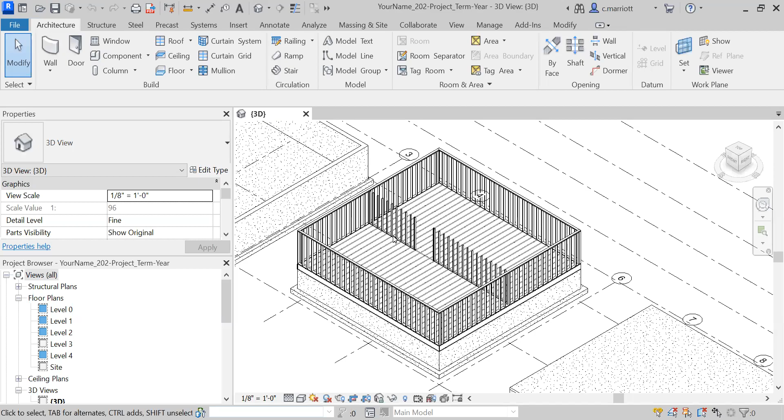In this video, we'll continue working on this bearing wall. So we're going to start adding some of the top plates across the top here. I'll do this by copying one of these and copying it up to the top of the studs. So I'm going to go to section number 1.

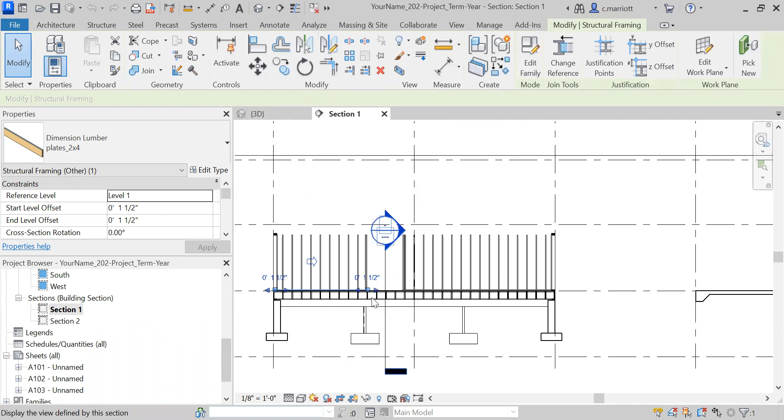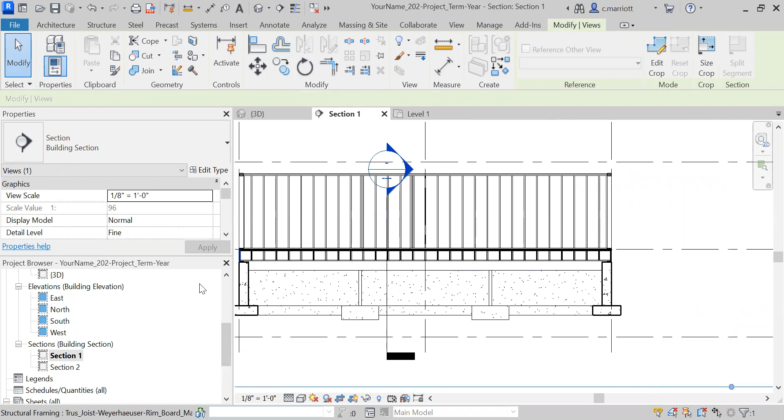Okay, now one thing that we'll need to do, if you go to level 1, and if you haven't done this already, if I click on that section, if it is stretched all the way back to here, when I go to section 1, it's going to show all the framing in the distance. If I don't want to see all that framing so I can isolate what I'm trying to do, I'm going to go back to level 1 and pull this closer in so I'm not seeing this line of studs in the background. So go back to section 1.

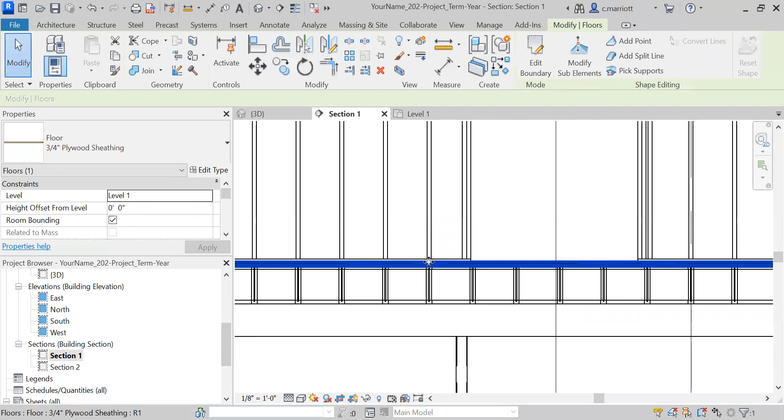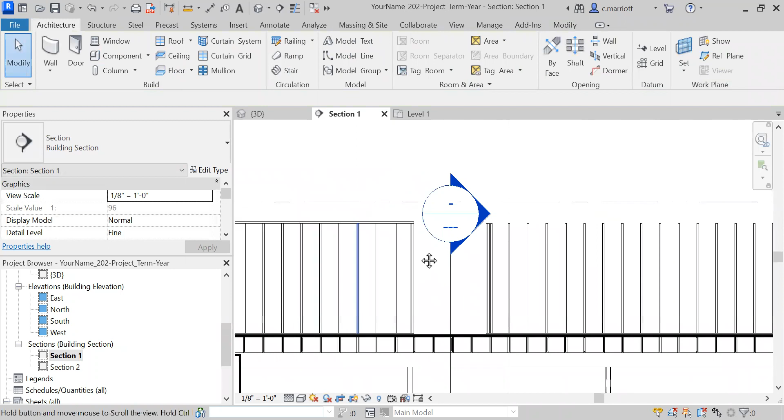And this is the plate that I'm going to copy up. Oops. I come in a little closer, copy, and my dimension is going to be the stud height plus the thickness of a plate. So I'm going to do it at 41.125 inches. And let's see how it is. Okay. Now, for these top plates, they need to stretch all the way across.

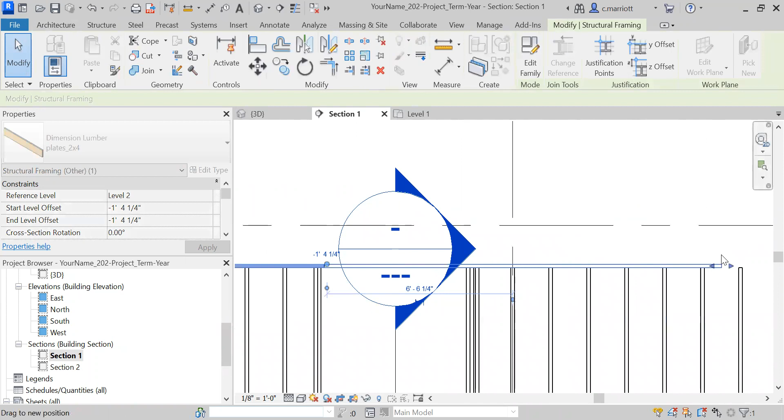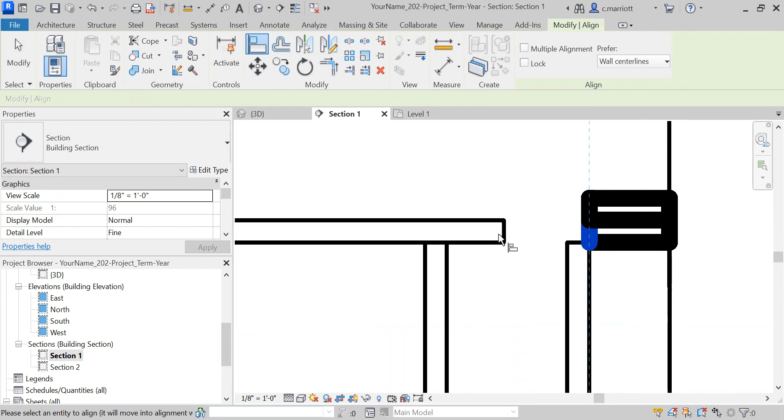Oops. So I'm going to click on it, having some issues here. I'm going to stretch it all the way over and grab that little triangle, pull it across. And when I get a little closer, I will use the Align tool to bring it the rest of the way. Let's do that again. Align, pick. I can do either edge of these plates here and bring that over.

Okay, so now it's stretching all the way across, and then what I can do is make another copy 1.5 inches above that, and it'll just sit right on top. Okay, so now we've got the double top plate along the top of the bearing wall.

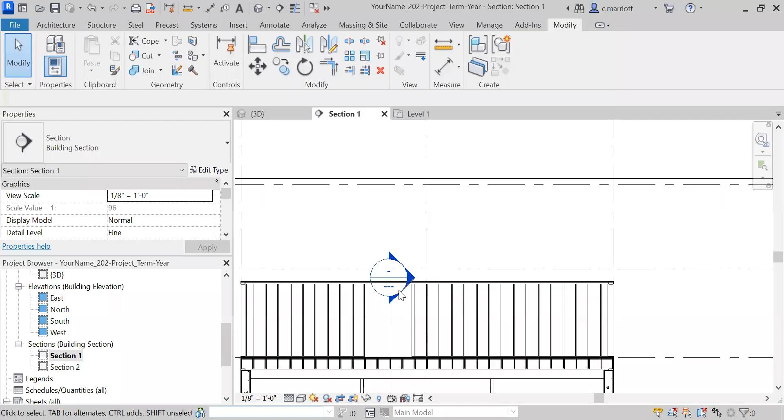Now this rectangle right here is the opening for the door. But one thing we have to keep in mind is that this wall is a bearing wall, meaning that the loads from the floor above are resting on the wall. And right now, with just this double top plate, I don't have enough structure to take the load of those floor joists that are going to rest on top of this section right in here. This would start to sag and potentially fail structurally. We need to put in something called a header.

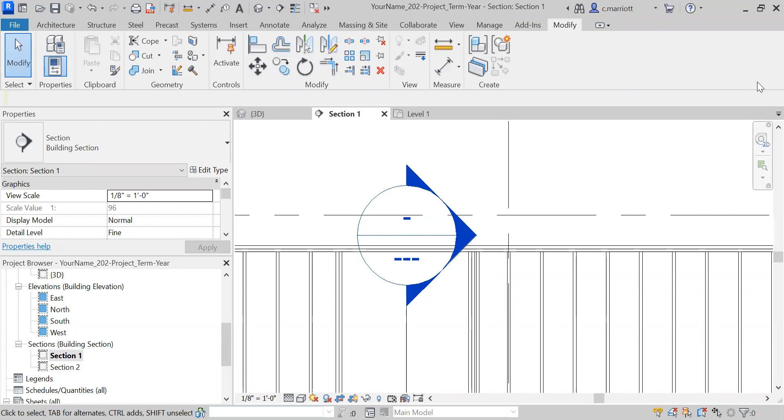So here's a page of your textbook. And what we see here are a series of openings. Here's a door opening. Here's a window opening. At the top is a header. So again, you need the header to carry any kind of loads that are being transferred from above.

This header, as is noted here, is a sandwich of 2x members. So they are going to be 1.5 inches wide, plus a 1/2 inch spacer in between them. So 1.5 plus 1.5 plus 1/2 inch gives us a 3.5 inch dimension. You want the faces of these members to be in alignment with the face of the studs.

Now, in this case, above the header, we have something called cripple studs. Sometimes you'll see these, sometimes you won't. Sometimes they just make a slightly deeper header and eliminate the cripple studs. It's perhaps more material usage, but it could also be less in terms of labor.

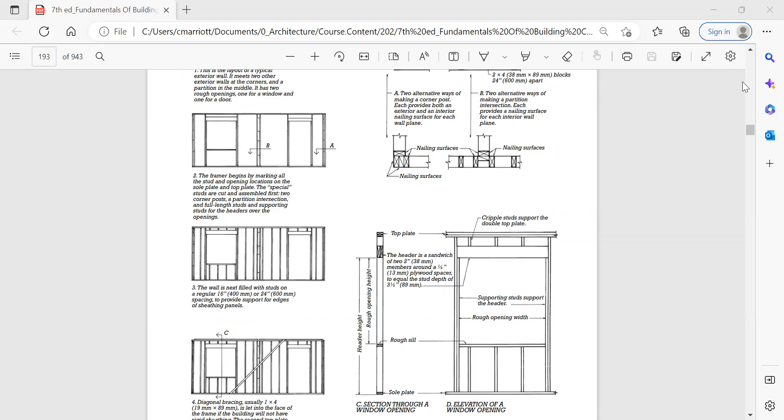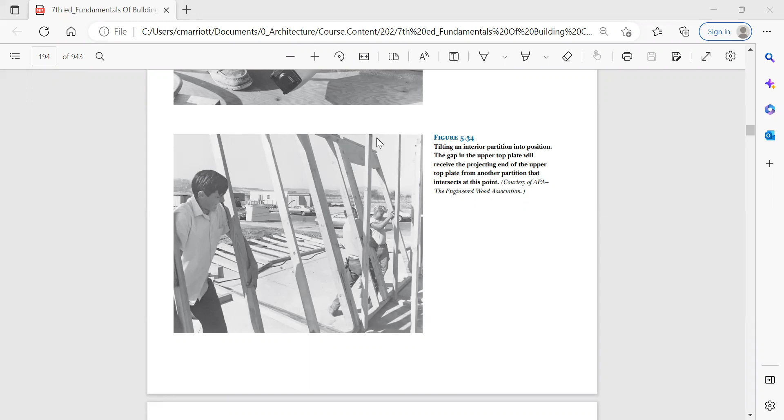So here's an example of a header that has no cripples. You just see the double top plate up here. This is going to be what we draw in ours. We just don't really have a sufficient dimension to go ahead and add a header plus the cripples. So we'll do a detail that looks something similar to this.

So to illustrate a little bit about how I came up with some of the numbers that we're going to be using, this is the wall section that we've been looking at previously, and I made a copy of that so I could look at the dimensions needed for the opening. So typically for residential architecture, doors are going to be 80 inches, 6'8" (80 inches equals 6'8"), or 7 feet. In this case, I'm going to make the rough opening set for an 80-inch door.

So you'll see that these dimensions are a little bit more because you need space for the jamb and for some shimming. So it's going to be slightly larger than the 80 inches that the actual door panel might be. We have a couple of plates up here, top plates, and then we have a header that's going to be located over the opening. So in this case, this dimension is not quite right.

Let me fix that. So what I have here, when I take this 97.125, which is the space from the subfloor to the underside of the joists above, I'm going to take that 97.125 and subtract the necessary rough opening that I need for my door. I'm going to subtract the two top plates; they're 3 inches when you add them together. And what I'll end up with is a dimension that would be appropriate for the header. It's a little bit bigger than the standard dimension lumber, but this will work fine for our purposes. I'll just have a slightly larger rough opening.

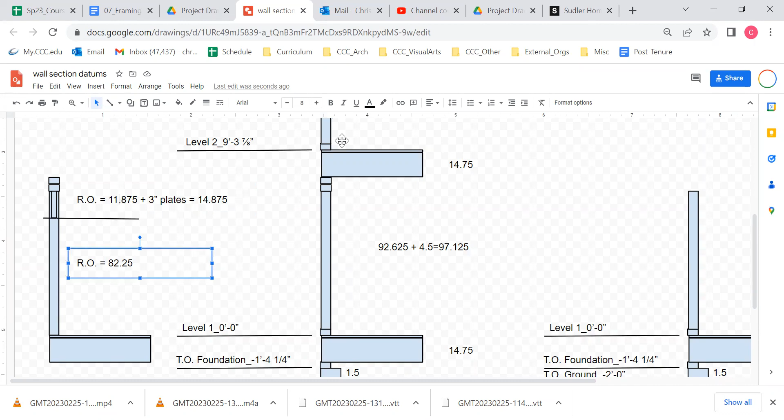Now, looking at one of the pages of your textbook, you'll notice here that the boards and dimension lumber have a nominal size and an actual size. So, we've been using 2x4s, which are 3.5, 2x6s, 5.5, etc. Once we get up to 2x8s, it goes from a 1/2 inch increment to 1/4 inch. So we're going to be making that header out of 2x12s, which are 11.25 inches.

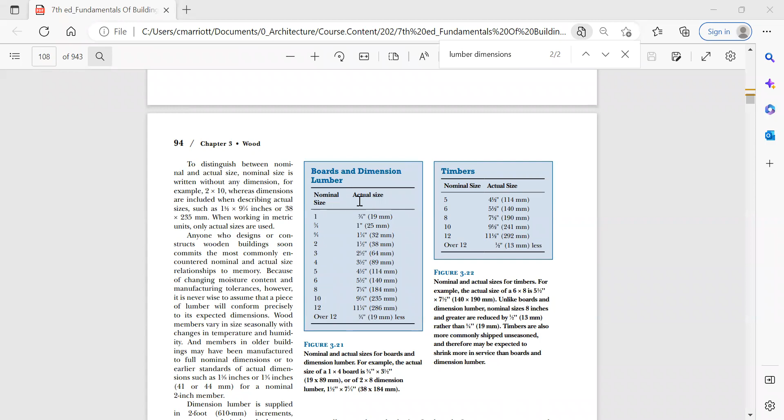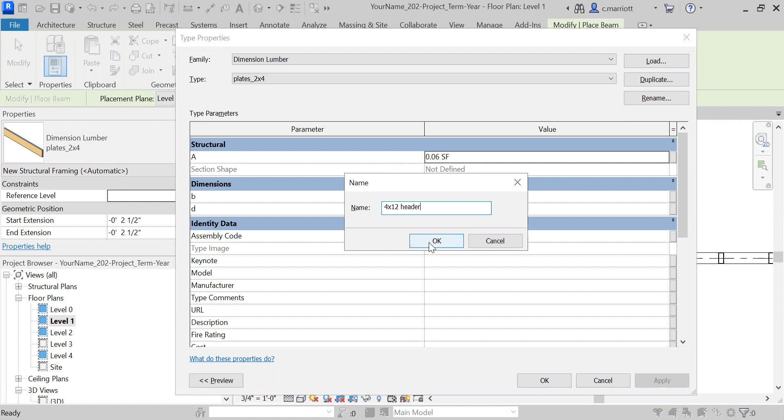So I'm back in level 1, and I'm going to add that header in this zone right here. I'm going to go to the beam tool under structure, and I'm going to edit the type. I'm going to duplicate this, and I'm going to call this a 4x12 header. And I'm going to say okay. That dimension will stay the same. I'm going to change this dimension here to that 11.25 inch dimension and say okay.

Now, I want to take a look at a detail before we proceed on with this next step. You'll notice that the header rests on one of those studs. This is called a jack stud. Right now, we've got our two studs both going all the way up to the top plate, but we need to bring them down. So I'm going to do that first before I begin adding the header.

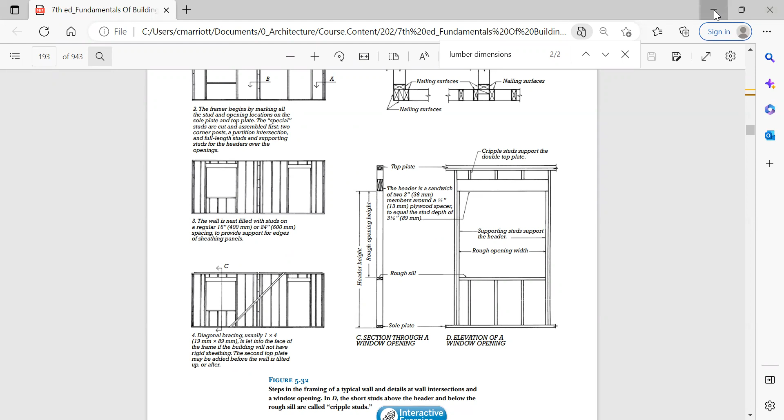So I will go to the south elevation, or no, I want to go to section number 1. And I'm going to click on this column, this timber column 2x4, and I need to make some adjustments for the top offset. I need to add an 11.25 inch dimension to that. Okay, now it's going to continue to be this negative value because I want it to be below level 2, but I'm going to change this to 2 feet 5 inches. And I'll do the same to the one on the opposite side, to get rid of the 3/4, and apply.

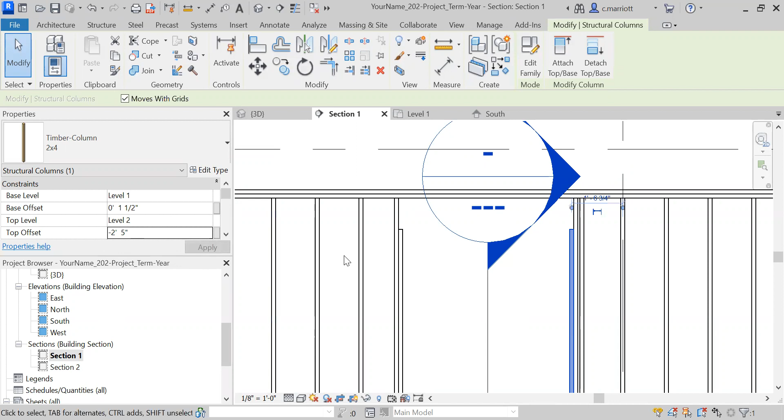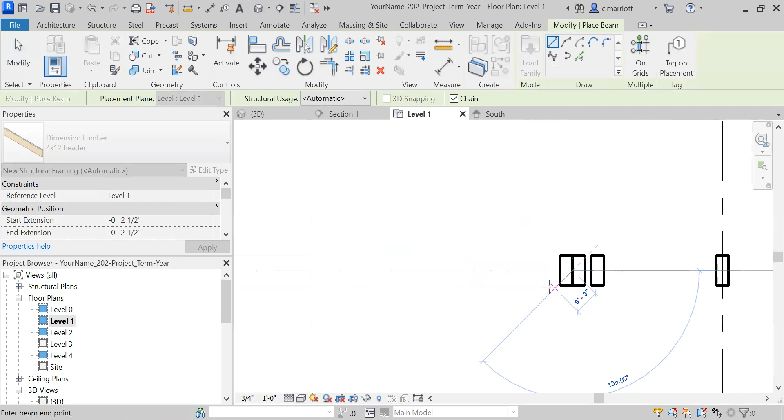All right, now I'll go back to level 1, and I will go to structure beam, and I'll add that header, and I want the header to go from the middle of those two. Looks like I'll have to use my alignments. Let's see how it looks in the section. Maybe we can complete it there. You can see it's been placed below level 1, and I want it to be above.

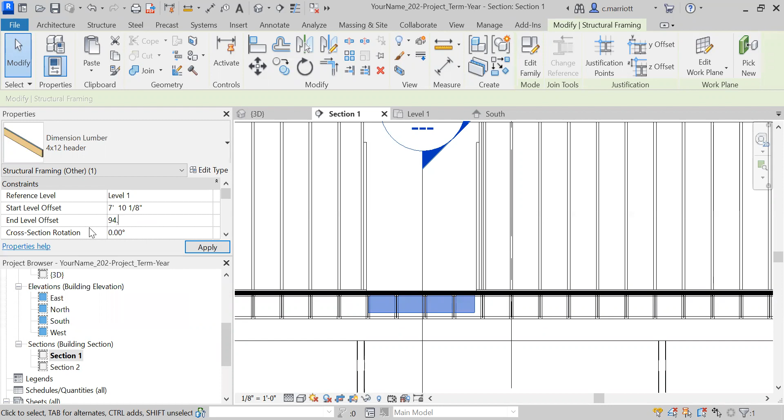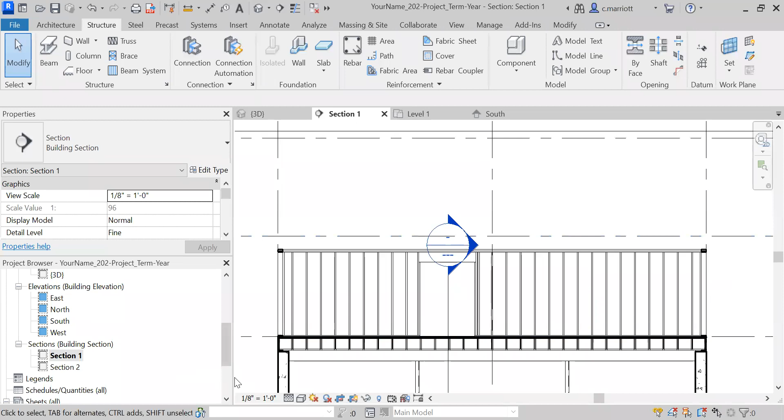So I'm going to make this start level 94.125 inches, and the end will be the same. Okay, so now it's sitting on top of the jack stud, but below the plate. Okay. So that concludes what we'll be doing for that bearing wall that's running across the middle of the structure. Let's take a look at how everything is in 3D. And that's it.